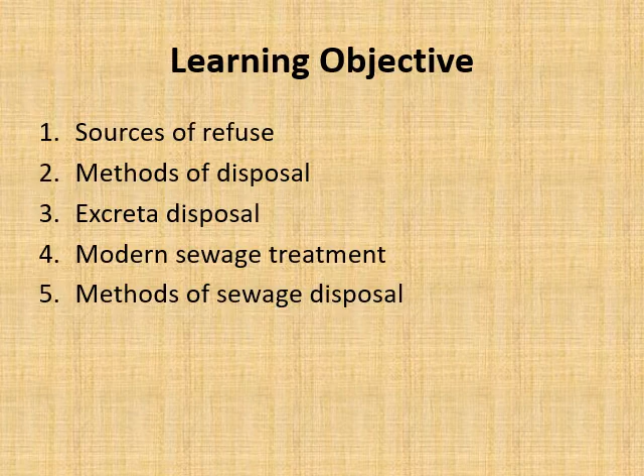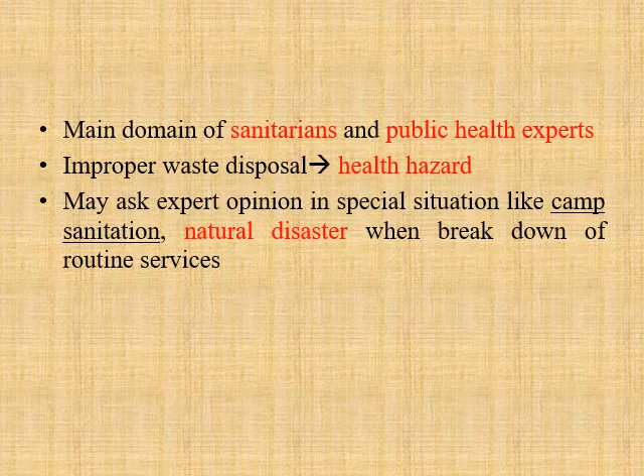So the main domain for waste disposal is of sanitarians and public health experts. If there is improper waste disposal, it will lead to health hazard. So we are here to give an expert opinion in special situations like camp sanitation, natural disasters, when breakdown of routine services is there.

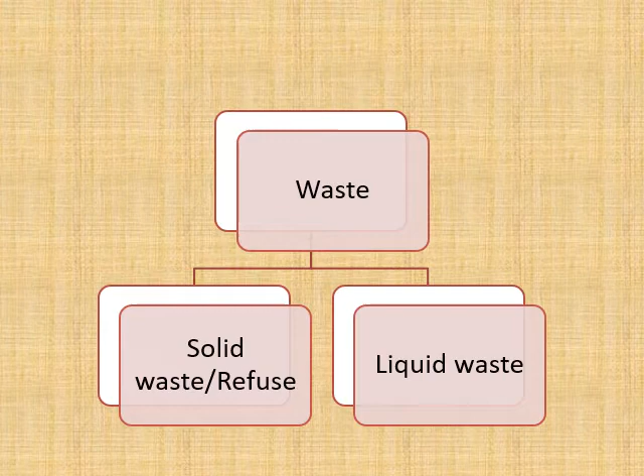So what do you mean by waste? Waste is classified into two types. One is solid waste, also called as refuse, and second is liquid waste. Solid waste or refuse is garbage, that is food waste, rubbish, that is paper, plastic, metal, throwaway containers, dead animals, manure, and ash. Ash is the residue from burning of wood, coal, charcoal, and other combustible materials.

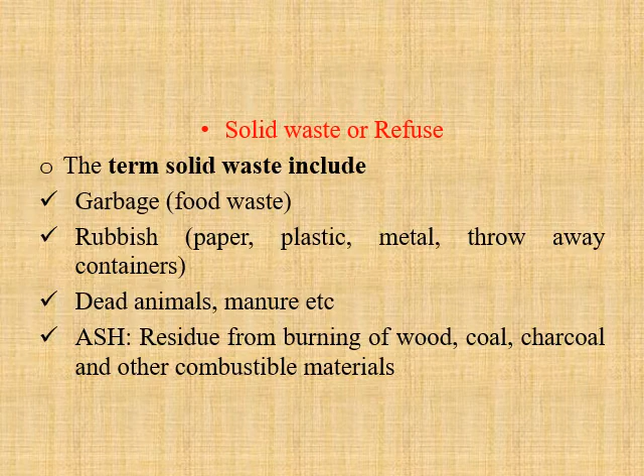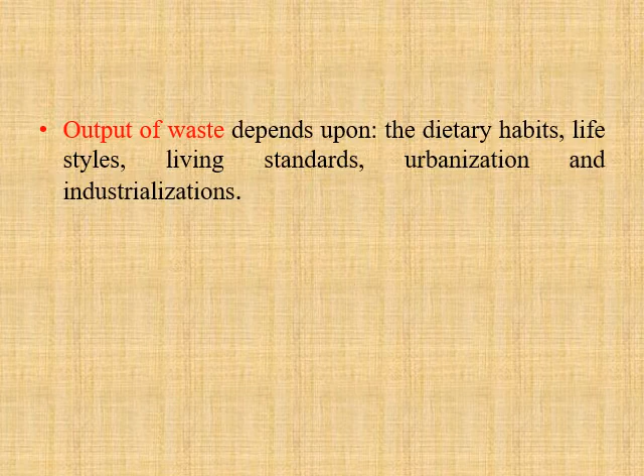So all this forms solid waste or refuse, but it does not contain the night soil. According to definition, the waste without night soil is called as solid waste or refuse. Now the output of the waste mainly depends upon the dietary habits of the public, their lifestyle, their living standards, and urbanization and industrialization. Altogether, solid waste will be like 0.25 to 2.5 kg per capita depending upon the lifestyle of the people living in that area.

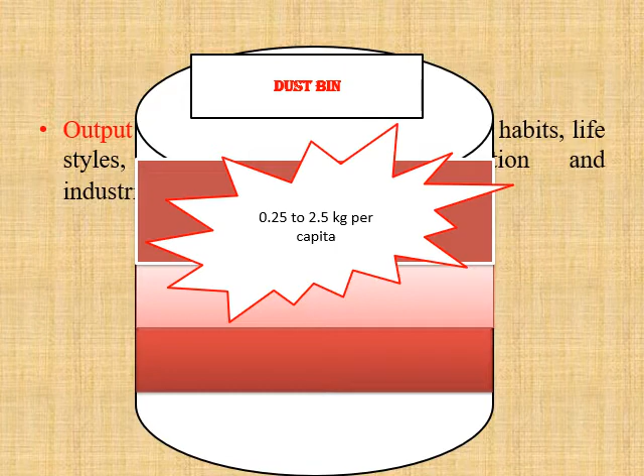So what are the health hazards related to this waste? First is the decomposition of this waste. It favors fly breeding. Due to flies, there are foodborne diseases like typhoid, cholera, etc. It also attracts rodents and vermin, rodents like rats, so it will again give disease. Soil pollution, water pollution, and last one is nuisance from the bad odor and unsightly appearance.

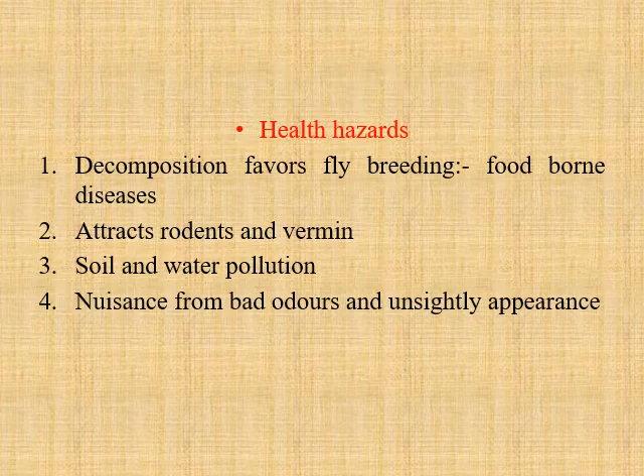Then what are the main sources of refuse, that is the solid waste? Main sources are street refuse, the one which we get on streets, market refuse, stable litter, industrial refuse, and domestic. Domestic is household.

Then how will we manage this waste? The first one is to store it. Second is to do collection properly, and then all this collected waste is disposed somewhere. There are various methods to dispose it. So what do you mean by storage? We will store all our domestic waste at the household level in dustbins, so it is stored at one place.

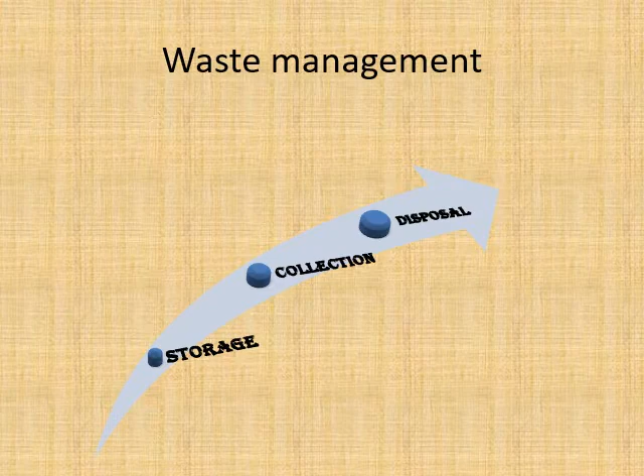From there, a municipality vehicle will come door to door to take the solid waste from the houses. So it is the collector; here collection is done, and from there it will be disposed. So the three main things in waste disposal are storage, collection, and disposal. All these three steps should be done properly and hygienically. If not, it will lead to various diseases.

So first is storage of waste. How do we store it? There are various methods. Galvanized steel dustbins are there with close fitted cover. It is very important that whatever dustbin you are using has a fitting cover. This galvanized steel dustbin can be used for 5 family members. It is 1.5 cubic feet and it can collect the garbage from the house for 3 days.

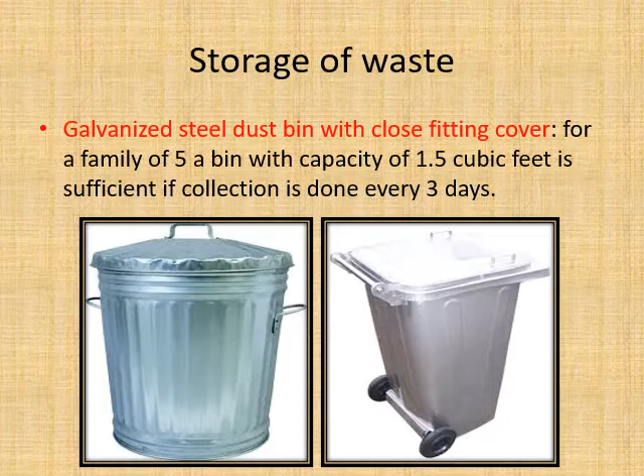Others are paper sacks. The sack itself is removed with content for disposal and a new sack is substituted. The main drawback of the paper sack is we cannot put anything which is wet or liquid, so it will tear off. In our place we use black bags or green bags, and along with the bags it is disposed.

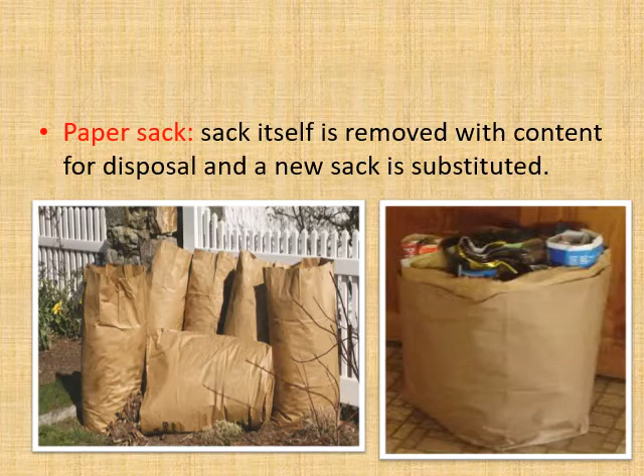Third one is public bins. The galvanized steel dustbins or paper bags were for individual houses. Public bins are for the community or for that gully. It is kept on a concrete platform raised 2 to 3 inches above the ground level so that soil pollution does not occur, and it should be fitted with a proper cover.

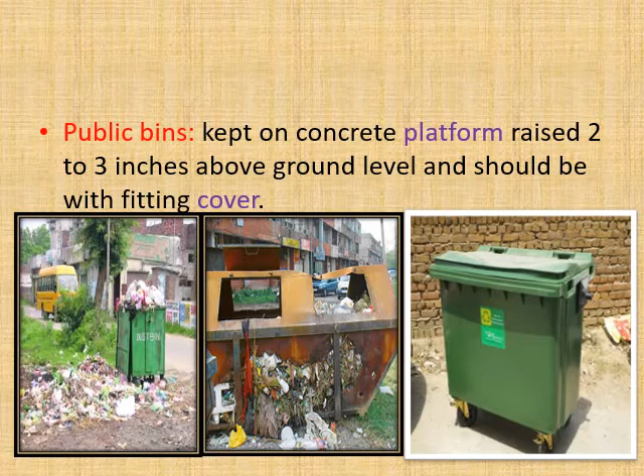It should not be open like this, or thrown just like that. It should be in this way. A properly fitted cover should be there, and all the people should come and put their garbage in these bins. They should not throw it like this.

This comes storage. Okay, now the next one is collection of waste. So how do we collect? There are various methods to collect. House to house collection is the best method. Everyone knows that at everyone's house there is a municipality truck which will come. It should be a closed truck basically, which will not give any problem for the waste. So it is best; it will come house to house and collect the stored garbage.

Now the main part is methods of disposal. These methods are divided into two main types, that is insanitary methods and sanitary methods. Insanitary methods should not be used because they will again give rise to various diseases. Usually sanitary methods should be used. Insanitary methods are like hog feeding and dumping. Sanitary methods are like sanitary landfills, controlled tipping, composting, incineration, manure pits or burial. We will see all of this.

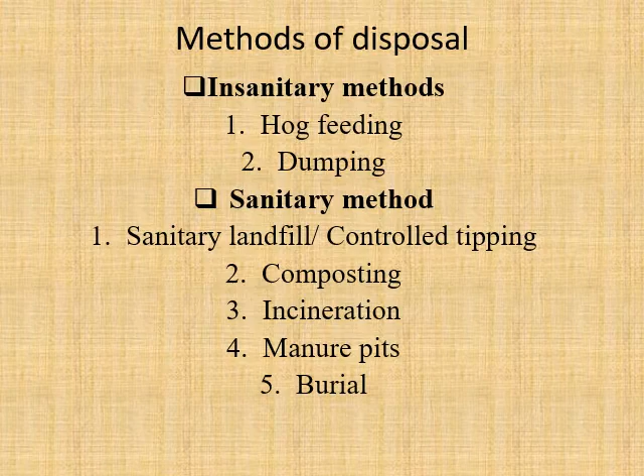So what do you mean by hog feeding? Here all the waste is given to them to feed. This is an insanitary method. It may lead to a number of diseases in animals as well as human beings. Then comes dumping. What do you mean by dumping? The refuse or solid waste is dumped in low-lying areas. They will search for some land outside the human dwellings and there they will directly put this refuse.

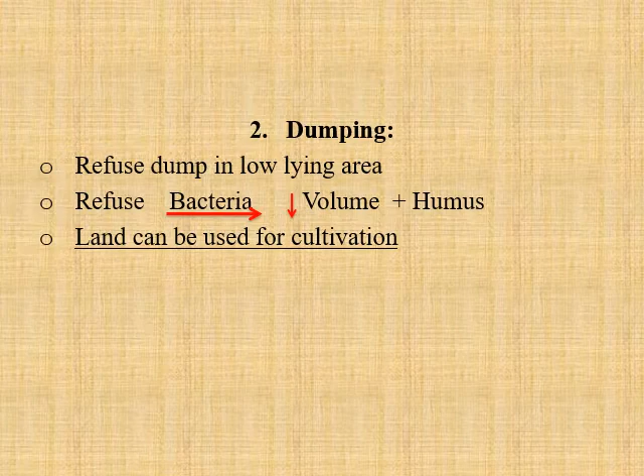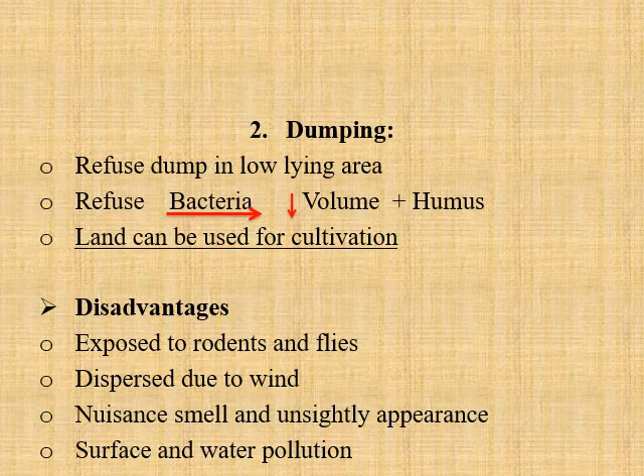So what are the disadvantages? The main disadvantages are it is exposed to rodents and flies. Second, it can be dispersed everywhere due to the wind. It causes nuisance, smell and unsightly appearance. It causes surface pollution, that is land pollution, as well as water pollution. So this is the most insanitary method.

Then sanitary methods. The first one is sanitary landfill, also called controlled tipping. It is the most satisfactory method of disposal. Adequately compacted refuse is placed in trenches, or the land is dug and there we put the solid waste. Again it is covered with earth, meaning soil, at the end of the working day.

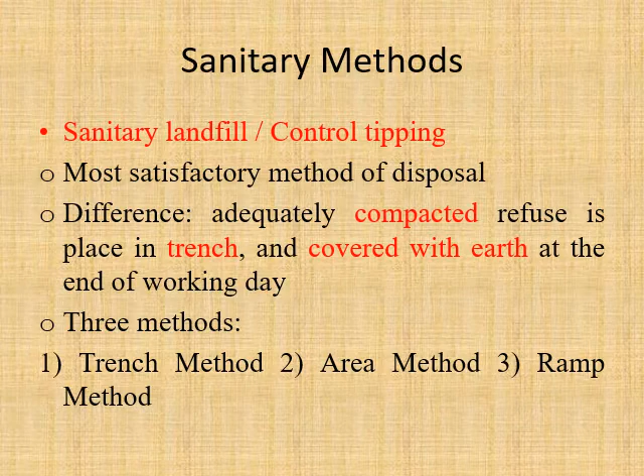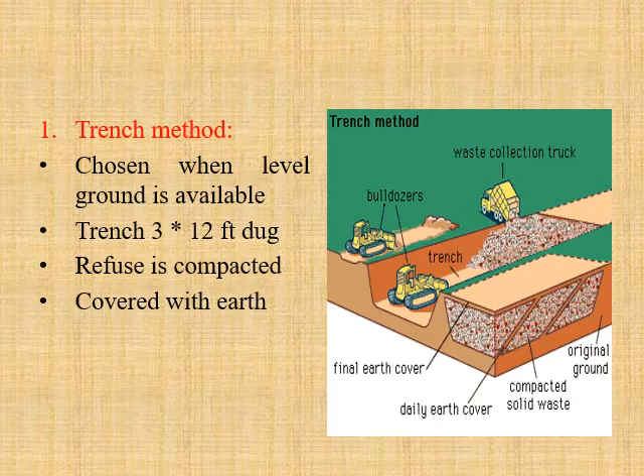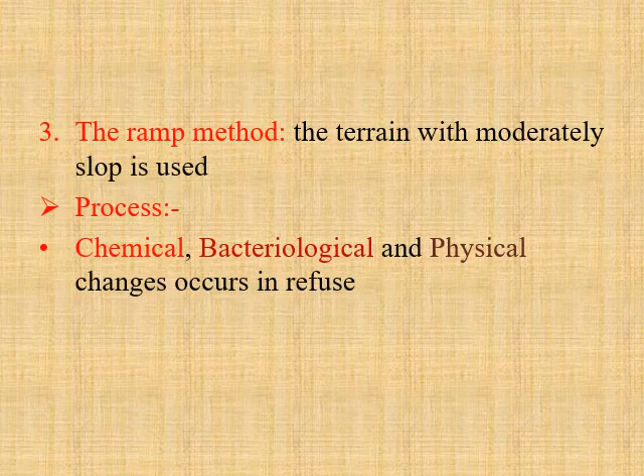There are three methods in this. First is the trench method, second is the area method, and third is the ramp method. For the trench and area methods we have to take only plain area, that is a plateau area. If it is a hilly or mountain area, then the ramp method can be used. In the process, chemical, bacteriological and physical changes occur in the refuse, due to which the refuse is degraded.

So what is the mechanism? Firstly, in the first 7 days, the temperature will rise up to 60 degrees. This increase in temperature will kill the bacteria and pathogens in the refuse and hasten the decomposition process. In the next 2 to 3 weeks, the temperature will cool down, and in the next 4 to 6 months decomposition will occur to the fullest and humus formation will be seen, and this humus can be used for cultivation and agricultural purposes.

Then comes the next method, that is called incineration. This is a high temperature oxidation process. This reduces the organic and combustible waste to inorganic and incombustible matter and results in a very significant reduction of volume and weight. So incinerators are mainly used in hospitals.

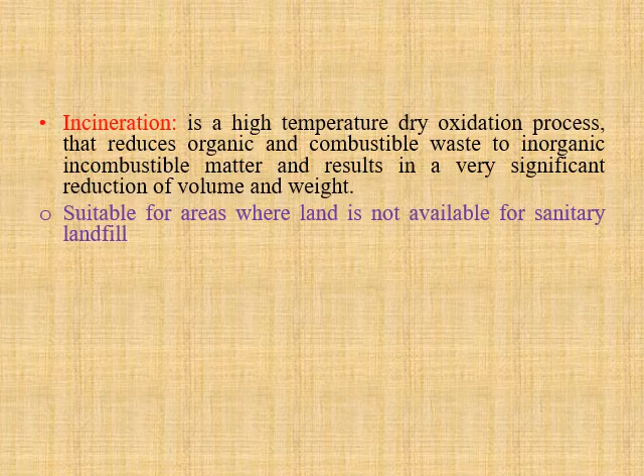Okay, so here what we do is, directly at high temperature we burn the refuse or the solid waste, due to which we get burnt ash and gases. So this is the disadvantage for incinerators. You will see that. So this is suitable for areas where land is not available for sanitary landfills. It is mainly seen in hospitals or tertiary care centers.

The disadvantage is it is very expensive, with no useful byproduct. That is, in landfills we can see that humus or manure is formed that can be used for agricultural processes. But here there is ash, and ash can't be used for any purpose. And secondly, the gases or fumes which are released can cause air pollution.

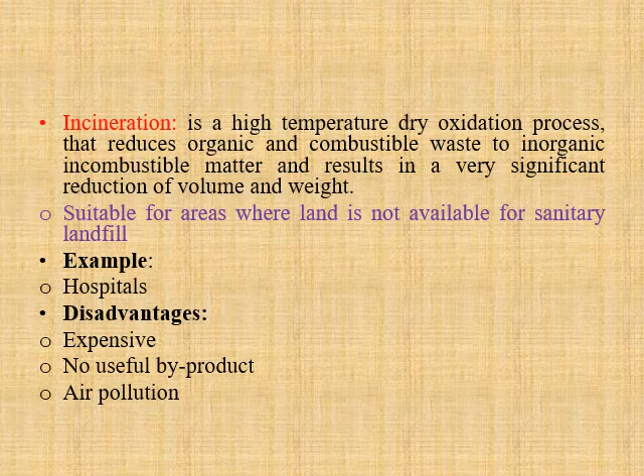Then comes the third method, that is called composting. Composting is a combined disposal method of refuse and night soil. Till now we were not using night soil, but in composting night soil can also be disposed. Here, bacterial action takes place on all this organic matter, temperature increases, pathogens are killed and humus is formed, that is called compost, along with carbon dioxide, water and heat. So 60-degree heat is generated, which will destroy the pathogenic agents.

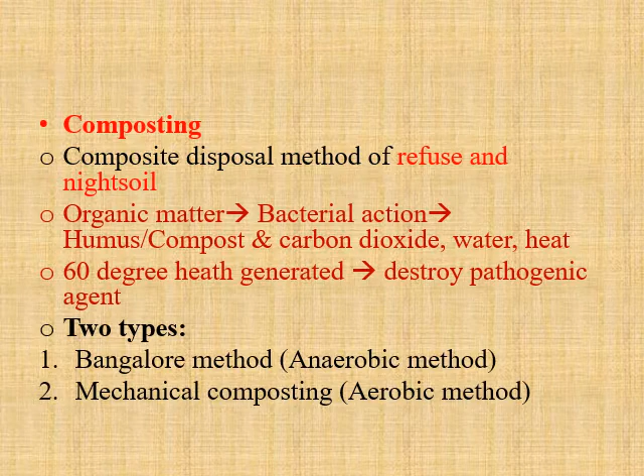So there are two types of composting. One is the Bangalore method, the second one is the mechanical method. The Bangalore method works in anaerobic conditions, so it is also called the anaerobic method, and the mechanical method works in aerobic conditions, that is it needs oxygen, so it is called the aerobic method.

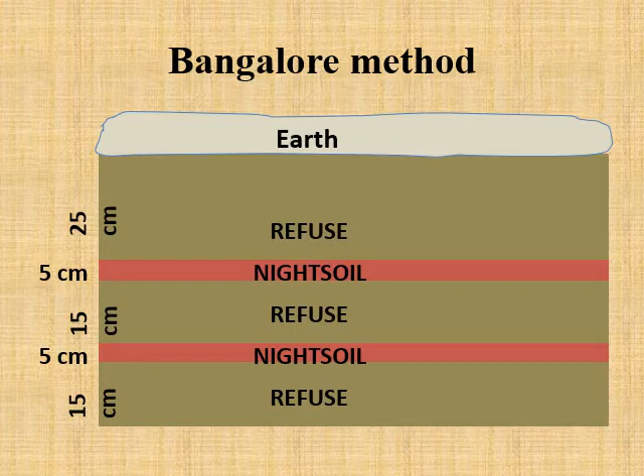So this is the Bangalore method. What we do here is, we dig a pit in the earth, or you could say we have a big rectangular box. In that a 15 centimeter layer of refuse is put, then 5 centimeters of night soil, then again 15 centimeters of refuse, then a 5 centimeter layer of night soil, and the last one is 25 centimeters of refuse, and above that we put the soil. Okay, and then we allow it to compost.

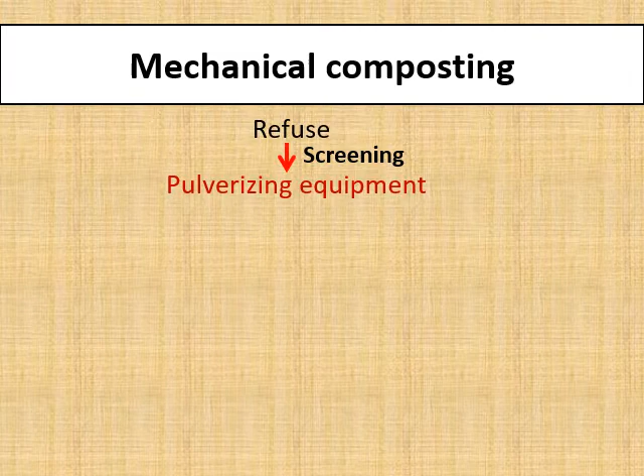In mechanical composting, the refuse is first screened in pulverizing equipment. Then the refuse we get out of it is added with sewage sludge and night soil. It is incubated; it is a mechanical method, so there are no bacteria. In the previous method it was the bacteria which increased the temperature. Here there is nothing like that, so we have to incubate and maintain the temperature, pH, aeration and moisture control, and after 4 to 6 weeks composting is complete.

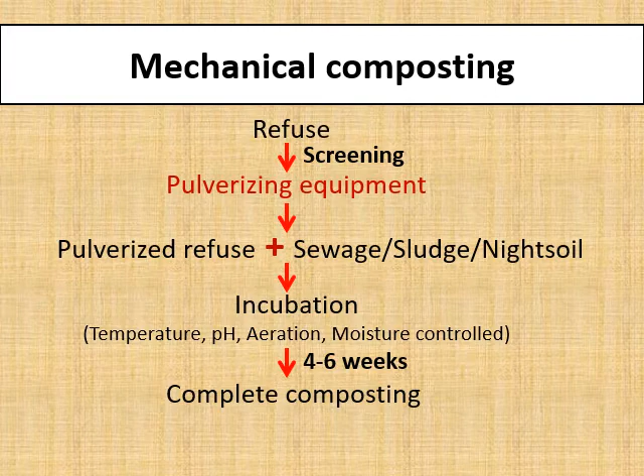Then come manure pits. These are mainly used in rural areas for individual households. Pits are dug in the earth. Usually there should be two pits. It is covered with earth after each day's dumping. So we dump all the waste in that, and above that a soil layer is kept. Within 5 to 6 months, decomposed refuse is formed, and that can be used as a fertilizer in farms.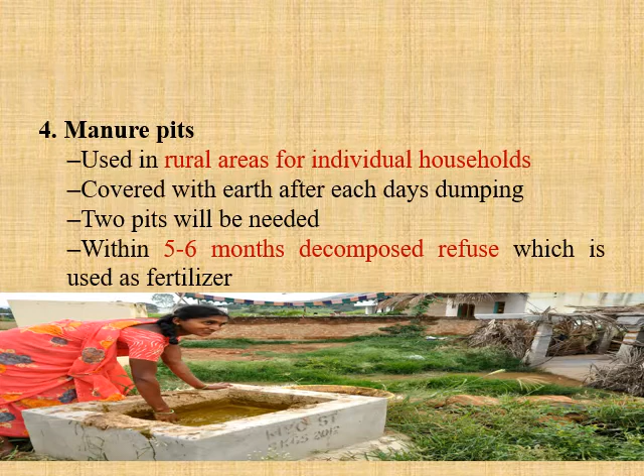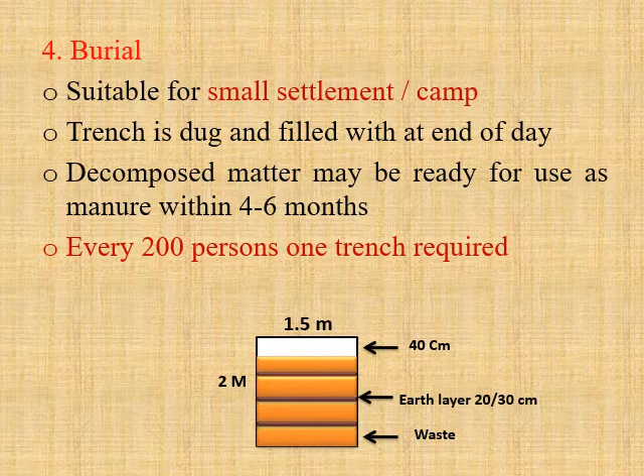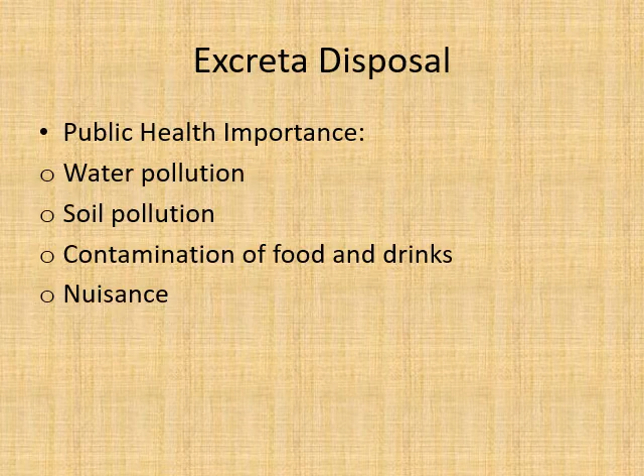Then comes methods for excreta disposal. So what is the public health importance? If we will not dispose it properly, what will happen? It may cause water pollution, soil pollution, contamination of food and drinks, which may lead to foodborne diseases and waterborne diseases, and it causes nuisance. It again causes propagation of flies, which lead to diseases like typhoid, paratyphoid fever, dysentery, diarrhea, cholera, hookworm diseases, ascariasis, and viral hepatitis.

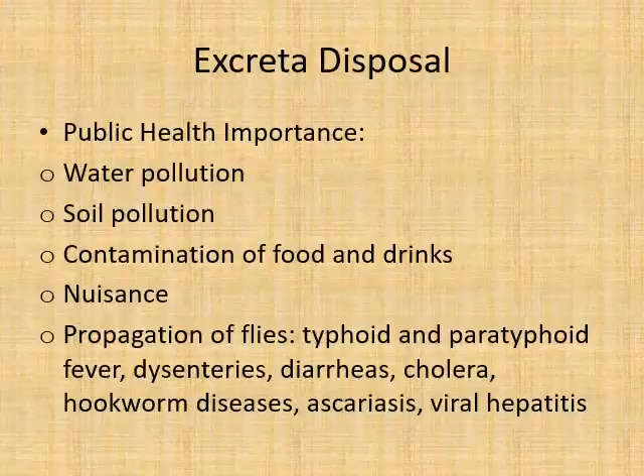So this is the cycle, the mode of spread of all this fecal matter to the man. This is a protected host, a man. Okay. So how it goes to the man? This is the vector which will take all this fecal matter towards man. It may be by water, by fingers, by flies, soil and food. So what we can do is we can maintain one barrier in between this. If we maintain a barrier, this fecal matter will not reach these vectors, and from this vector it won't go to the susceptible host or man.

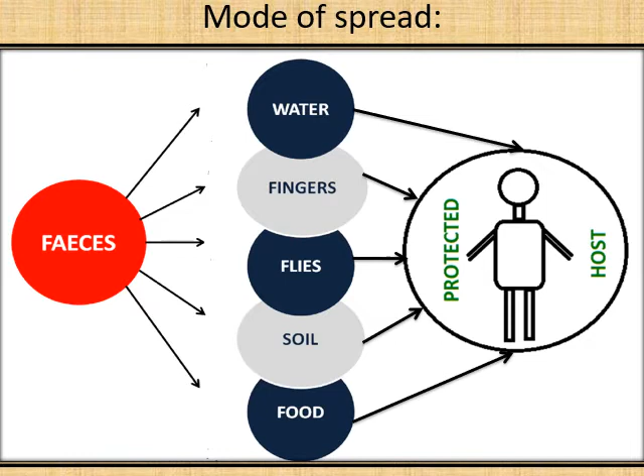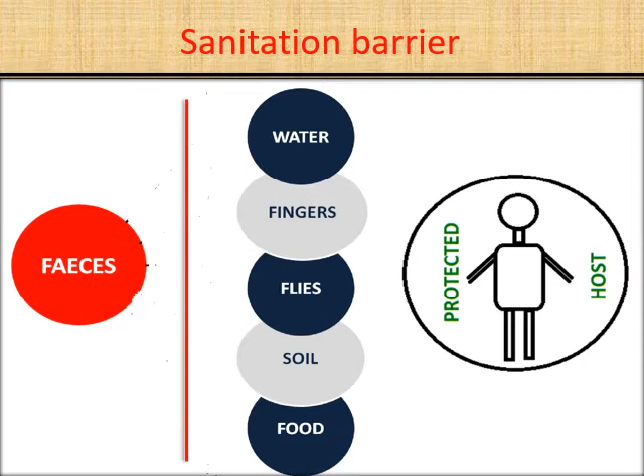So that barrier is called as a sanitation barrier. If a sanitation barrier is maintained between this, then obviously from the source the infection won't go to the host. So what do you mean by sanitation barrier then? It is the barrier of hygiene that prevents contacts between contaminated matter and susceptible host.

Okay, to maintain this, what we have is sanitary latrines. So sanitary latrines which are used nowadays have a water seal type. So it is also called as water seal type sanitary latrines. Why it is water seal? What are the plus points? It prevents access by flies and it prevents odor and foul gases. So you might have seen our daily using sanitary latrines. It has water filled in. Okay. So it is called as water seal type.

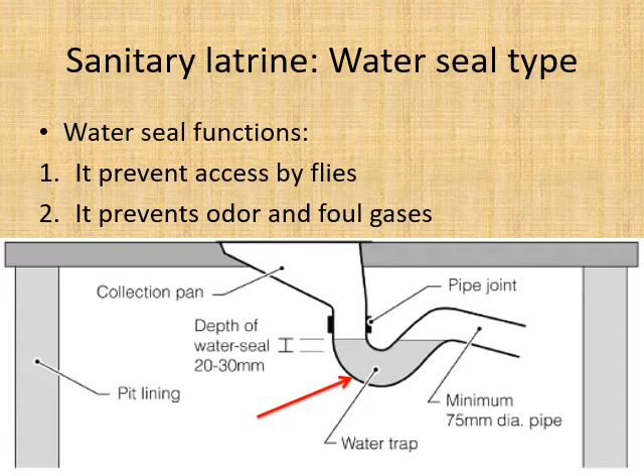So this is the ground level. Okay. Here it is the pan. It is called as collection pan. Depth of the seal. Okay. And this is the water trap, and here it will be disposed into the septic tank. Here the pipe is attached to septic tank. Septic tank.

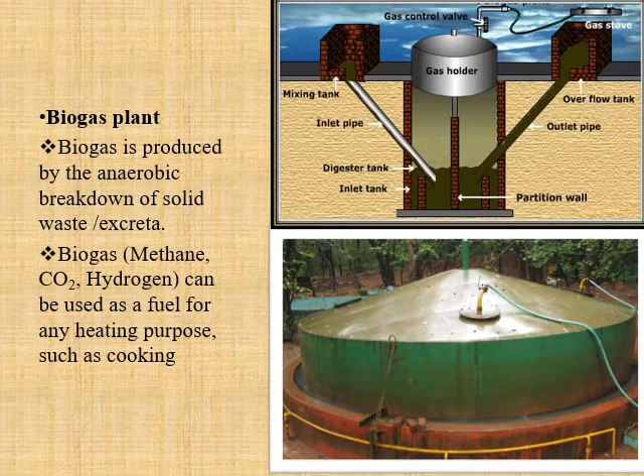So this is the upper part of the biogas plant. So biogas is produced by anaerobic breakdown of solid waste and excreta. Biogas, methane, carbon dioxide and hydrogen, can be used as a fuel for heating purposes such as cooking.

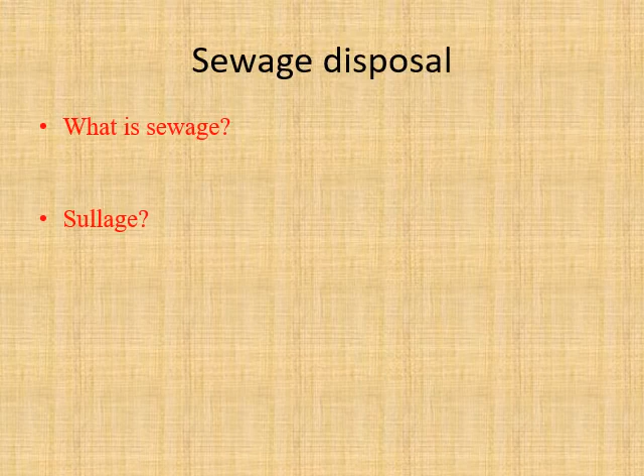Then comes sewage disposal. So what is sewage? What is sullage? Sewage is wastewater from a community containing solid and liquid excreta derived from houses and streets. And sullage is wastewater which does not contain human excreta. So the difference between the two is that sullage doesn't contain human excreta and sewage contains every waste. Okay, every waste. So sullage is like the wastewater coming from kitchens, bathrooms, but not the toilets.

Then what do you mean by amount of sewage? It is the amount of sewage which flows through the sewerage system in 24 hours. So it is called as dry weather flow.

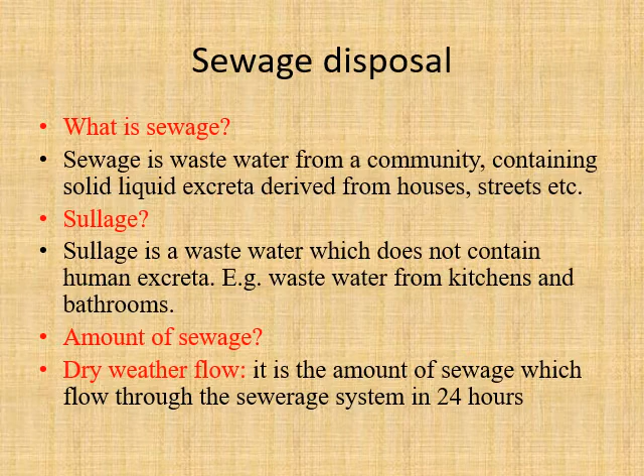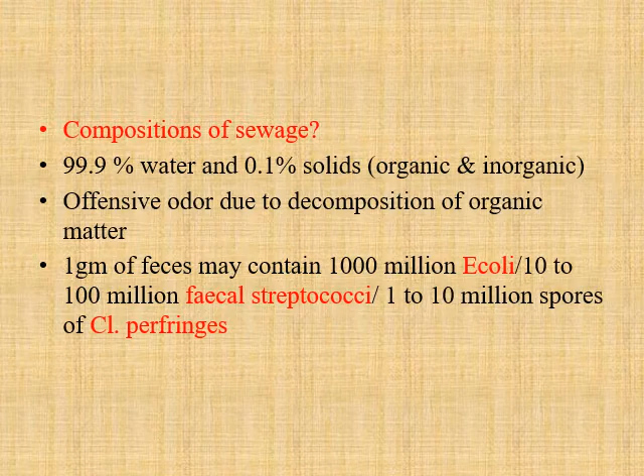Then what is the composition of sewage? So majorly sewage contains 99.9% of water and 0.1% of solids. In solids, there are organic and inorganic solids. It has an offensive odor due to decomposition of organic matter. It is said that 1 gram of feces may contain 1000 million E. coli, 100 million fecal streptococci, and 10 million spores of Clostridium perfringens.

So what is the aim of sewage purification? Why do we do it? We do it to stabilize the organic matter and to convert the sewage water into effluent of acceptable standards of purity, to safely dispose of into land or river.

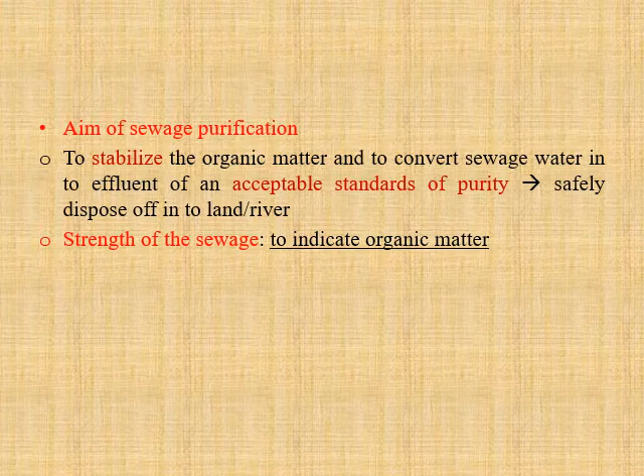So strength of sewage is to indicate the organic matter. What do you mean by BOD? That is biochemical oxygen demand. It is defined as the amount of oxygen absorbed by a sample of sewage during a specified period, that is 5 days, at a specific temperature, that is 20 degrees centigrade, for aerobic destruction. So BOD means, for aerobic destruction or aerobic degradation, what is the amount of oxygen which is required? So it is for a specified period and specific temperature. We will keep a portion of the sewage and we will see how much oxygen is needed.

So the range of biochemical oxygen demand is 1 milligram per liter of natural water to 300 milligram per liter of untreated domestic waste. So we say that if BOD is more than 300 milligram per liter, then it is a strong sewage, and if it is less than 100 milligram per liter, then it is weak.

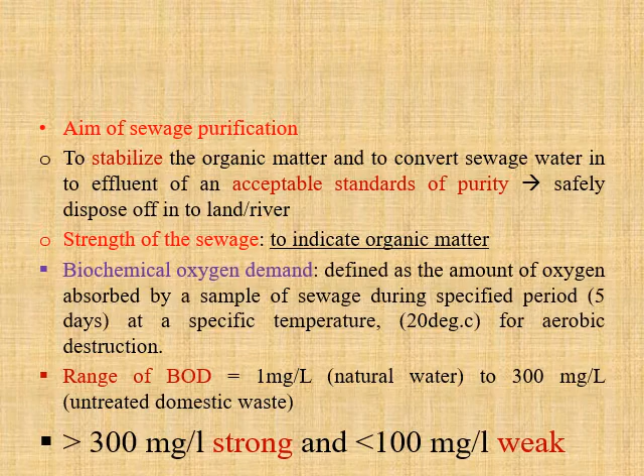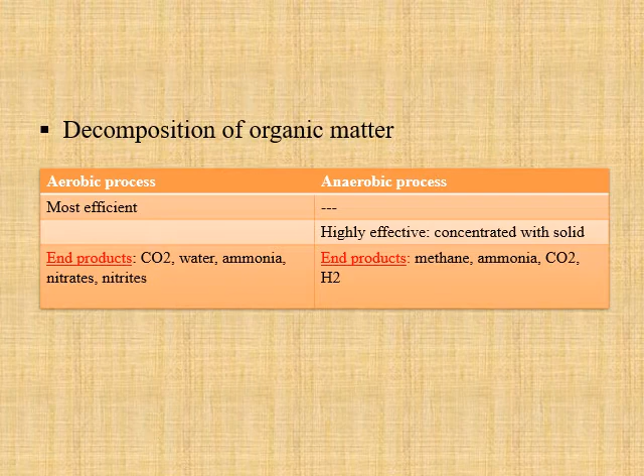So as I have told you, the decomposition of organic matter takes place in two ways, that is the aerobic process and the anaerobic process. The aerobic process is the one which needs oxygen, anaerobic is one which doesn't. The aerobic process is more efficient and the end products are carbon dioxide, water, ammonia, nitrates and nitrites. The anaerobic process is highly effective, it is concentrated with solids, and end products are methane, ammonia, carbon dioxide and hydrogen.

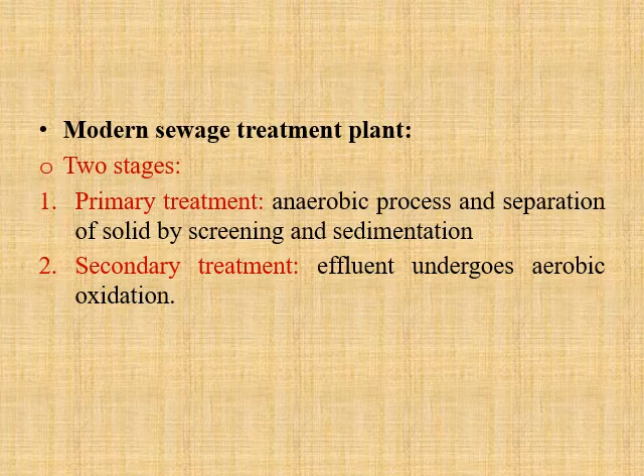Nowadays, the one which is used to treat the sewage is the modern sewage treatment plant. There are two stages in a modern sewage treatment plant. First one is primary treatment and second is secondary treatment. In primary treatment, basically we screen the sewage which is coming for treatment. So it is an anaerobic process and separation of solids by screening and sedimentation. Secondary treatment is the remaining part. After primary treatment, whatever is remaining, that is the liquid portion, is the effluent which will undergo aerobic oxidation.

So here you can see that sewage is coming. Here there is screening. Screening is done usually by nets or bars, steel bars. From here it will go to the grit chamber and primary sedimentation tank. Till here it is the primary treatment. In the primary sedimentation tank, anaerobic degradation of the sewage will occur. After that, the remnant of primary treatment will go for biological treatment and then the final sedimentation tank. Here biological treatment will occur and it is called aerobic oxidation.

And from here it will go to the sludge digester. If sludge is there, sludge will be removed and it can be used for landfilling or drying beds, and the gas which is produced is methane gas, and the remnant liquid, which is now stable inorganic, is directly disposed off into the rivers.

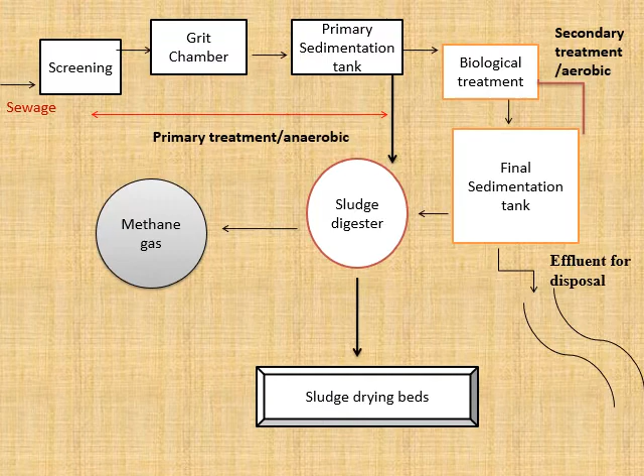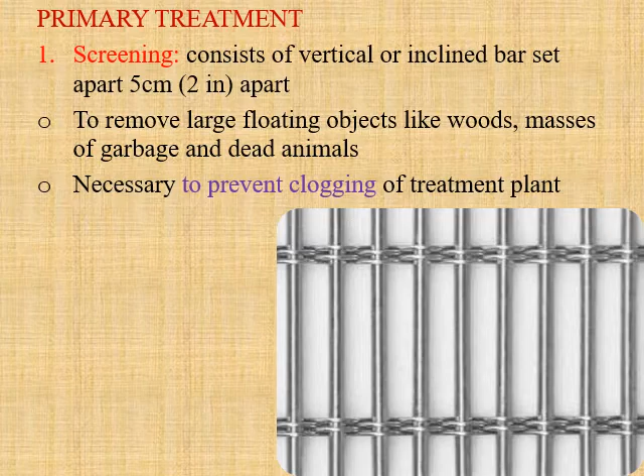So primary treatment. Here you can see these are the steel bars and the chains which are used for screening. This consists of vertical or inclined bars set 5 centimeters or 2 inches apart, so a distance of 5 centimeters is there between two bars. Why do we do screening? We do this to remove large floating objects like wood, masses of garbage and dead animals. Why do we have to do this? To prevent clogging of the treatment plant, because if these big floating objects remain there, then obviously the secondary treatment will not occur. So here you can see the bars. This is the screening, the first part.

Then comes the grit chamber. Here you can see the sewage is coming. There were large bodies which were screened by the bars, and from here the remnant of it is coming. So what is a grit chamber? It is a 10 to 20 feet length chamber in which the sewage will come at a velocity of 1 foot per second.

It will come very slowly with detention time, remaining there for a period of 30 seconds to 1 minute. Due to this there will be sedimentation, that is settlement of solids like sands and gravels.

Grit collected at the bottom is removed periodically and disposed by dumping. So this grit which is collected, or whatever is collected after screening at the bars, we have to dispose by dumping. From this grit chamber, the remaining liquid part will be measured now, because all the solid parts are screened at the bars and secondly in the grit chamber.

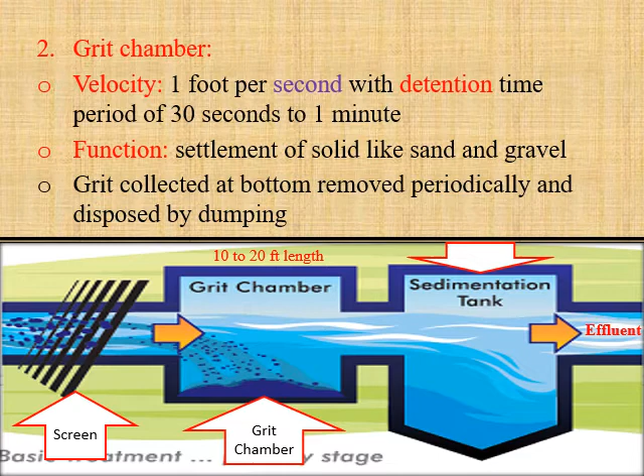So now all the liquid is called effluent, and it will go into the sedimentation. So what is a primary sedimentation tank then? It is a rectangular tank.

In this, the velocity of the sewage is 1 feet per minute and the detention time is 6 to 8 hours. For purification, nearly 70 to 80% of solids are settled down and there is 30 to 40% reduction in coliform. So bacteriologically it will reduce and solids have also reduced, so the volume will also reduce and the organic matter will also reduce.

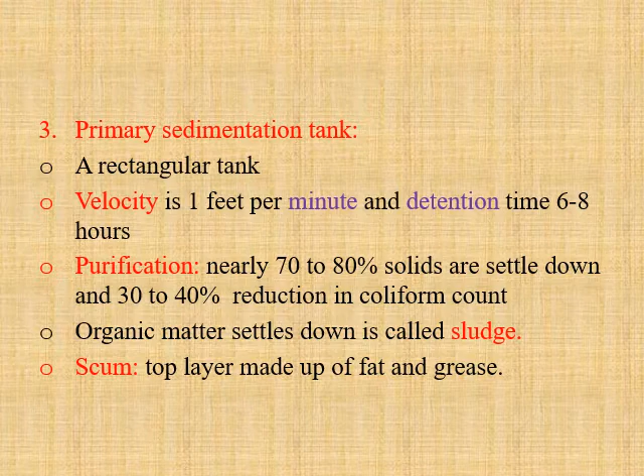Organic matter that settles down is called sludge. What I showed you in the grit chamber is called sludge. Scum is the top layer made up of fat and grease. I showed you this in the septic tank also.

From here, all the remaining which is there, that is the effluent, or the liquid part not having solid waste in it, will go into the secondary treatment now. In secondary treatment, the first thing is biological treatment. It can be done by two methods: trickling filter method or activated sludge process.

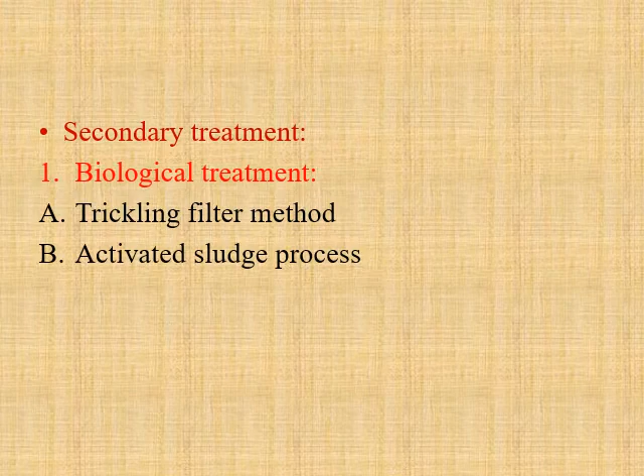Effluent from the primary sedimentation tank is sprinkled uniformly on the surface using a revolving device. If it is a circular one, we put all this effluent on these crushed stones. What will it do then?

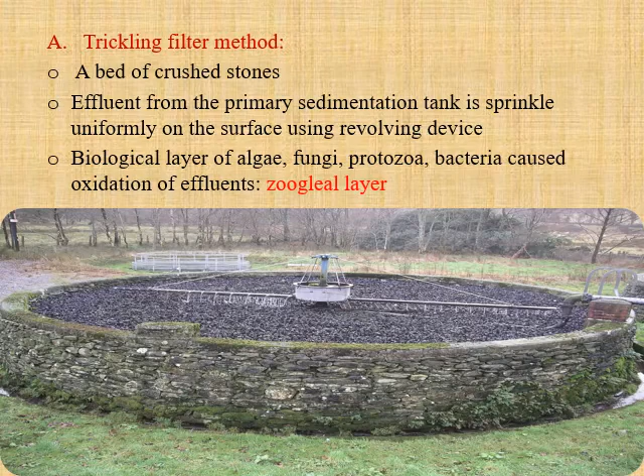Now see, this is the close view. Here you can see these are the crushed stones, and this is the effluent which we are sprinkling overall. The greenish layer you see is called zoogleal.

Now the other method, called activated sludge process (ASP). The heart of ASP is the aeration tank. Here we mix the primary sedimentation tank waste, that is effluent, with oxygen, or we aerate it.

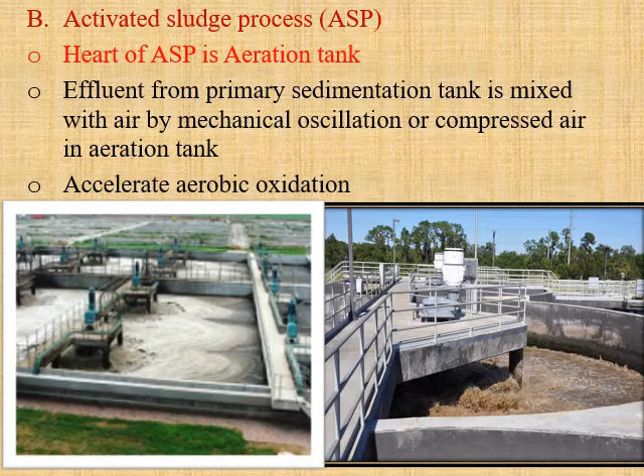Effluent from the primary sedimentation tank is mixed with air by mechanical oscillation or compressed air in the aeration tank, to accelerate aerobic oxidation. This gives aerobic oxidation and reduces the organic matter.

Comparing the two: this is the trickling filter and this is the activated sludge process. Trickling filters need more large space, whereas activated sludge process needs a smaller space. Here there is only one plant, whereas here you can see it is 1, 2, 3, 4 and n number.

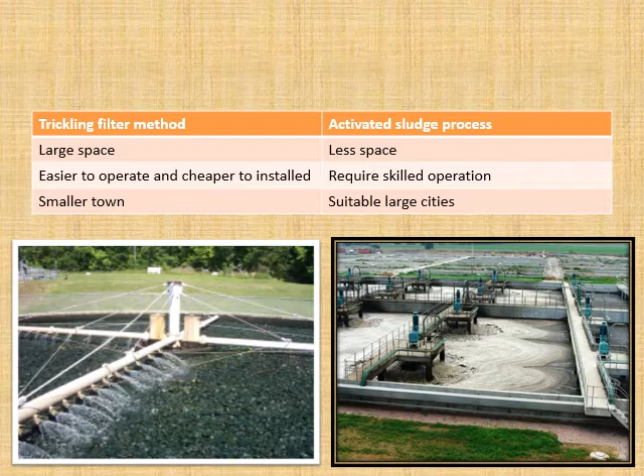The trickling filter's advantage is that it is easier to operate and cheaper to install. Activated sludge requires skilled operations. Trickling filter method can be used for smaller towns, whereas activated sludge process is suitable for large cities. From here, this was all biological treatment.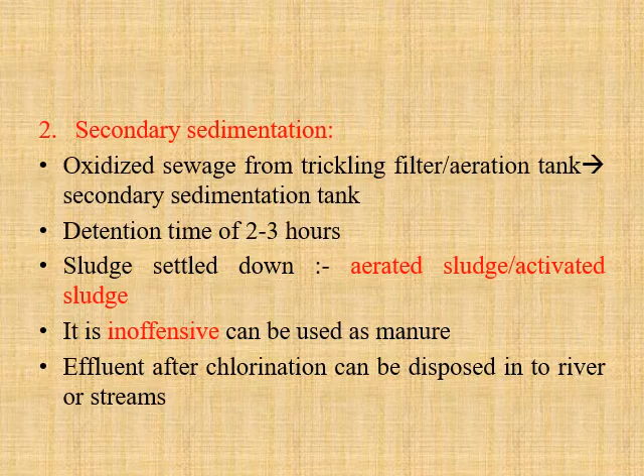From here the process moves forward to what is called the secondary sedimentation tank. Oxidized sewage from the trickling filter or aeration tank goes to this tank, where it stays for 2 to 3 hours. Due to this, the sludge settles down - this is aerated or activated sludge. It is inoffensive and can be used as manure. Whatever sludge is collected in the secondary sedimentation tank, the effluent after chlorination can be disposed into a river or stream.

Now let me show you the sludge digester. Here you can see the screen, grit chamber, and primary settling tank - till here it was all the primary method. From here comes the secondary stage, which is aeration. For aeration we use two methods: the biological method, which includes trickling filters and the activated sludge process. Then there's the secondary settling tank, from which you get sludge and liquid. The liquid can be chlorinated and directly disposed into the river. The sludge is put into the sludge digester, and from there it is processed further and can be used as manure.

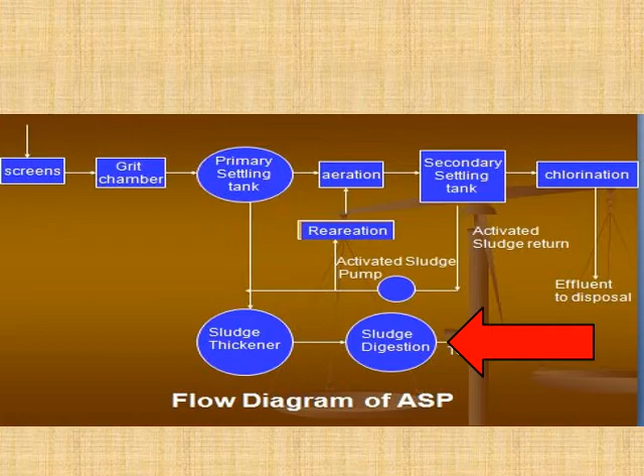In the sludge digester, 1 million gallons of sewage produces 15 to 20 tons of sludge. This sludge is then incubated and undergoes auto digestion, which produces carbon dioxide, ammonia, and methane, and this methane can be used for heating.

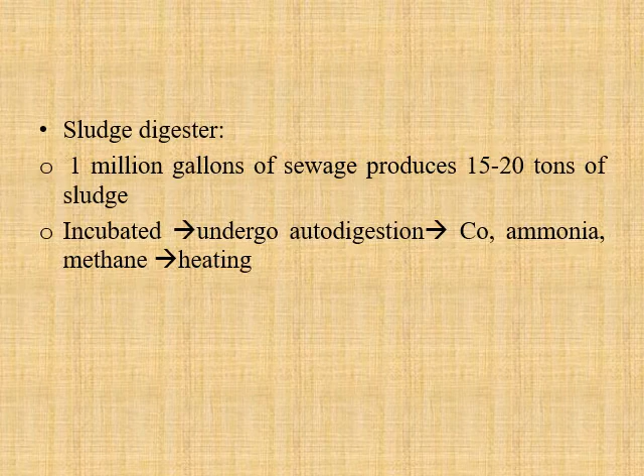What are the other methods of sewage disposal then? Sea outfall - directly putting it into the sea. River outfall - directly putting it into the river. Land treatment - similar to landfills, trenches are made and the disposal is put directly into the land. And oxidation ponds and oxidation ditches.

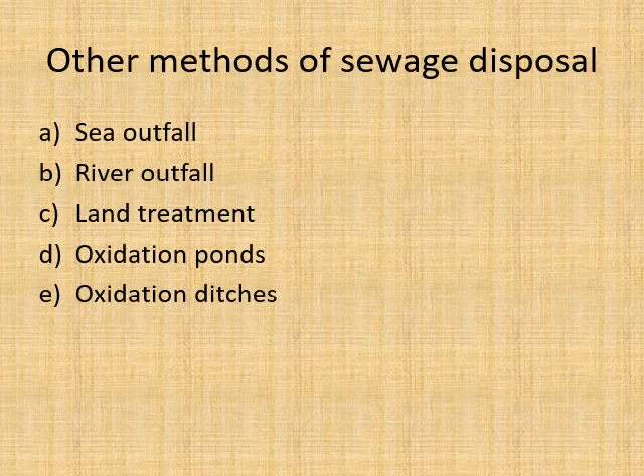Let's look at the oxidation pond, also called a waste stabilization pond, which you might have seen at various places. How does it work? The raw sewage waste comes into the pond, which contains bacteria. The bacteria mix with oxygen, degrade the waste, and form carbon dioxide, ammonia, phosphate, and water. Where does this oxygen come from for the bacteria? It is the algae present in the water which gives the oxygen. This is hand in hand work.

Algae gives oxygen, bacteria acts with that oxygen and reduces the raw sewage waste, producing carbon dioxide, ammonia, phosphate, and water. This carbon dioxide and ammonia are again taken up by algae to produce more algae and give more oxygen. It is a vicious circle. This is the daytime process - when there is sunlight, algae produces oxygen with the help of sun, and at night it becomes anaerobic degradation of the waste. So in the oxidation pond there are two ways: aerobic and anaerobic.

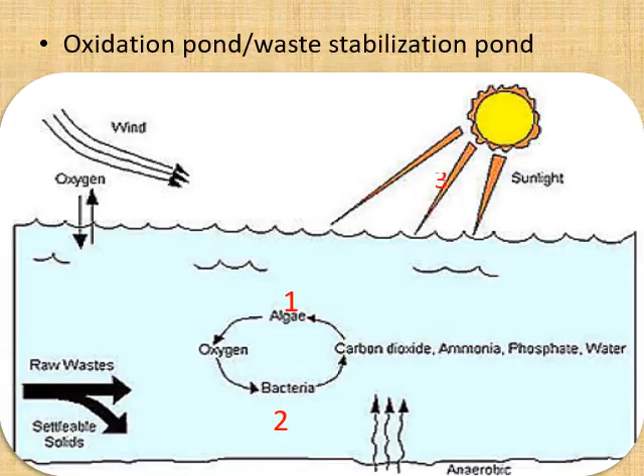Then the last one is the soakage pit. What do you mean by soakage pit? We have seen disposal for sewage and excreta, but what about kitchen or bathroom waste, or industrial waste? There is the soakage pit for that - it handles disposal of liquid waste from kitchen, bathroom, and industrial wastewater. The mechanism here is biological degradation or mechanical straining. In biological degradation, the sullage - as I told you before, it doesn't contain night soil - gets attached to the surface of stones.

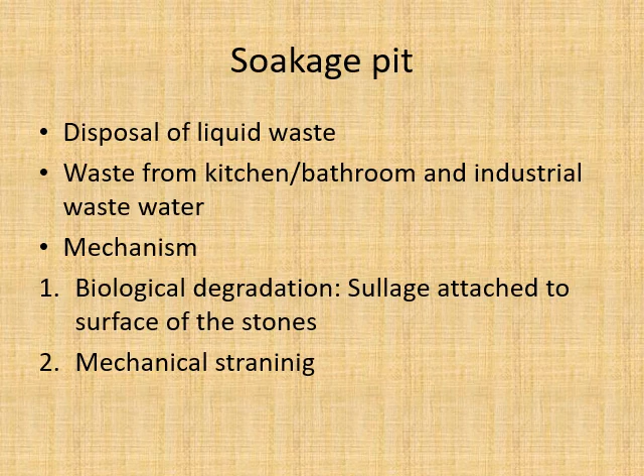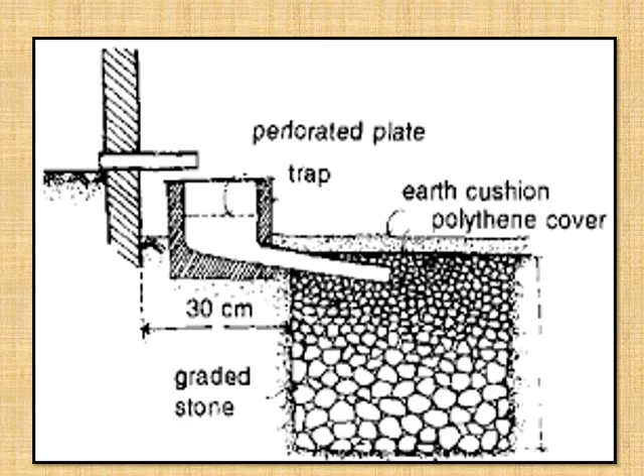This water coming from the kitchen or bathroom is directly put into the soakage pit through mechanical straining. Here you can see the inlet or pipe which directly throws the water into the pit - this is the soakage pit. This is the earth cushion and this is the gravel layering of stones, from which the water percolates. The same process occurs - a zoogleal layer degrades the organisms and purifies the water. From here the water is collected and can be treated and directly disposed into the river.